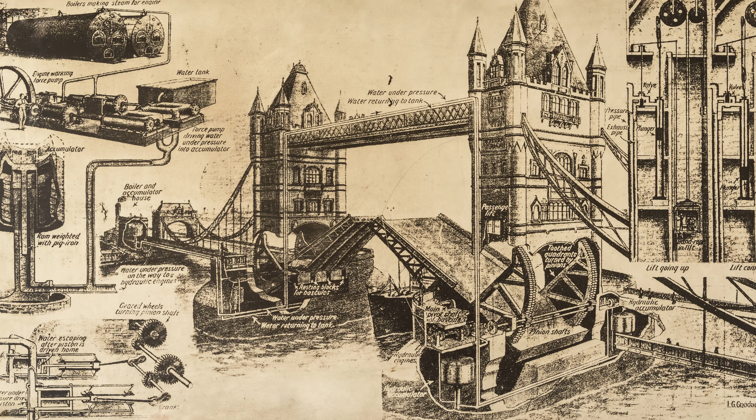This is a complex bridge. Most bridges that engineers get an opportunity to design, I used to design bridges, are straightforward. They're carrying either a road or a railway from one side of an obstacle to another. This has got many more dimensions because of the machinery required to lift the bascules and the complexity of the steel and masonry combination and being over a river, and the foundations being super critical in order to make the thing robust and stable and last for a long time as it has.

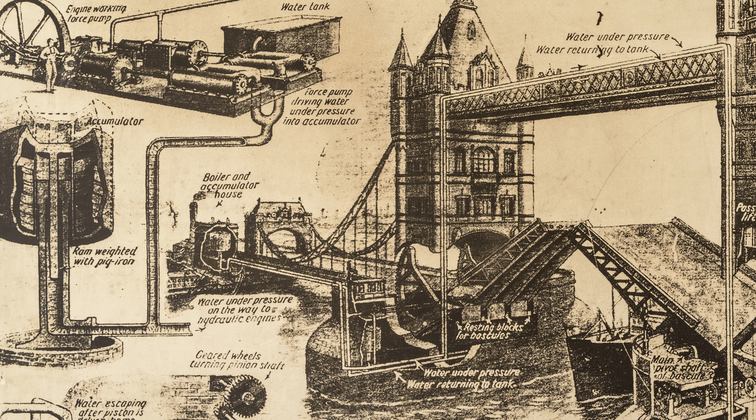Well, William Arrol was the ultimate steel fabricator specialist. He built a business on being able to produce large amounts of steel fabricated in a way that was put together very efficiently. William Armstrong was another very important man, wasn't he, with the mechanics and again, groundbreaking design of the accumulators. Yes. The Armstrong Mitchell Company, as it was then, up in Elswick, Newcastle, was mainly known for breakthroughs in armaments and industrial shipbuilding.

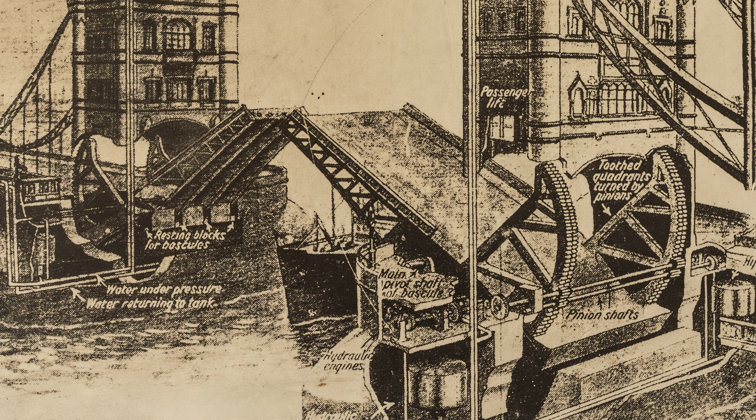It's nice to see them deployed on something peaceful and enduring, as they did with the hydraulic system for the Tower Bridge. And that's a piece of brilliant energy conservation because they recognised that the bascules only had to work intermittently, and a lot of energy was required, but only in intermittent bursts, not continuous. They devised a way to bridge that gap by having continuous steam engines just running away, building up water pressure.

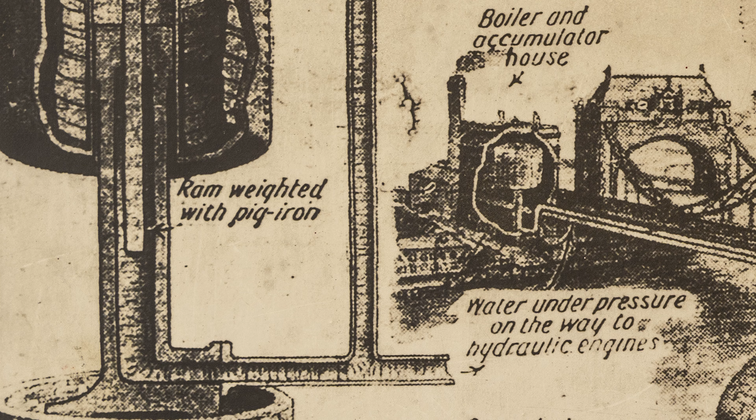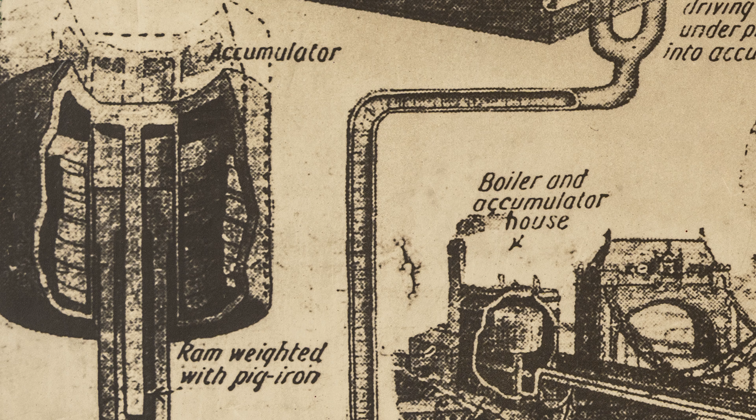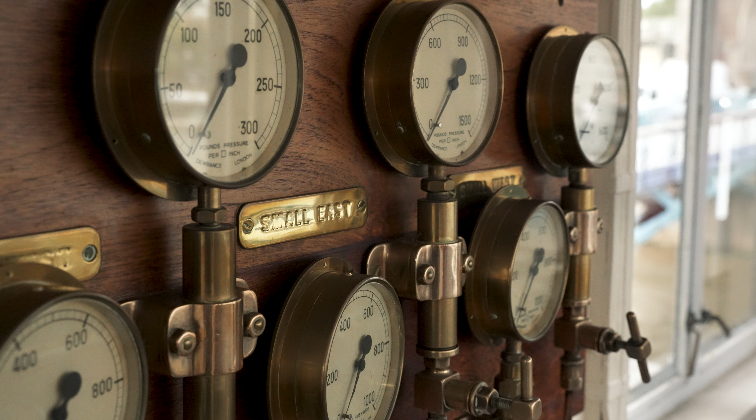But when the bridge wasn't being lifted, that build-up of pressure in the system was fed to the accumulators, as they called them. Basically a huge piston in a large tube, heavily weighted. And as the pressure built up, it rose slowly. But all the time it was rising, it was creating more and more potential energy. So when the bridge needed that energy again, it simply turned a lever and that came back into play, and the pressure reduced and it was expended on lifting the bascules instead of raising the piston.

Brilliant piece of very efficient engineering. It's the sort of thing that we need today. That's why engineers should always look into the history of their profession. There's always something to be learned.